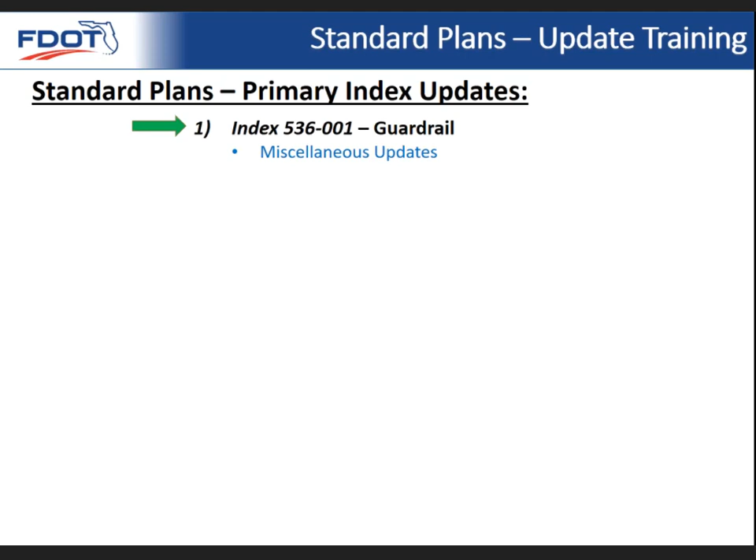Starting off with the guardrail, just some quick miscellaneous updates that might be of interest to the designers. We'll just quickly go through those.

We made some changes for single slope barriers. Basically, the barrier itself, as it connects to guardrail, and the offset blocks have changed. We've got some miscellaneous updates for constructability and clarity.

Today's presentation covers designers' items of interest, and that's true of all the future indexes we're going to talk about. We've made lots of little miscellaneous changes and improvements for the clarity of what contractors are doing in the field, but today we're just going to focus on the things for designers.

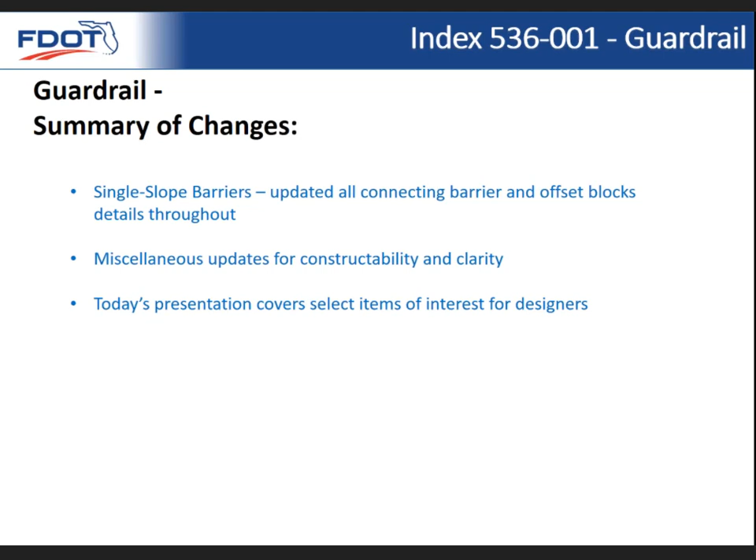For the complete red lines of all changes, if you're interested, you can see the Office of Design Industry Review website at this link.

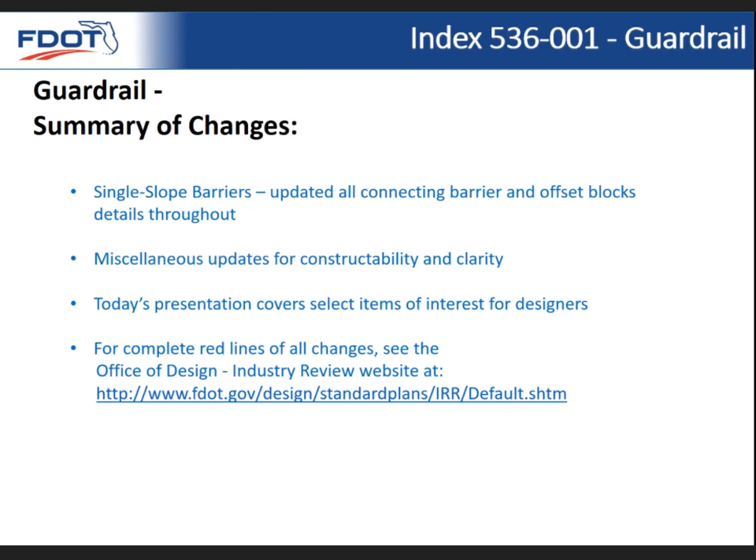Just going through a few things we've changed with the guardrail concerning the designers. We had received some input on this.

In the recently released standard, we went ahead and called out the maximum slope on shoulders for proper guardrail function. We heard some feedback that contractors might only look at the 1 to 10 max and not realize they need to look at the plans. Also, designers might see this and think they only need to meet 1 to 10 max, and don't need to look at the FDM.

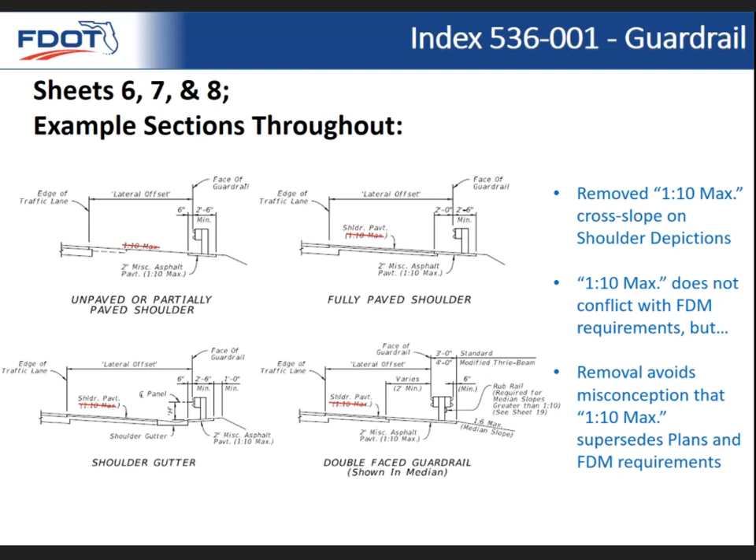While it didn't really cause any conflicts, we wanted users to realize this was not the only criteria, so we removed it as it's called out on the shoulder pavement. We did leave the 1 to 10 max in a few locations, just a generic cross section, and behind the curb, because we still want to drive the point home that 1 to 10 max is the maximum slope for guardrail function. We added a note explaining that the 1 to 10 max is for proper guardrail function only, and if you want to see the project specific cross slope, you need to look at the plans, and the FDM governs the plans.

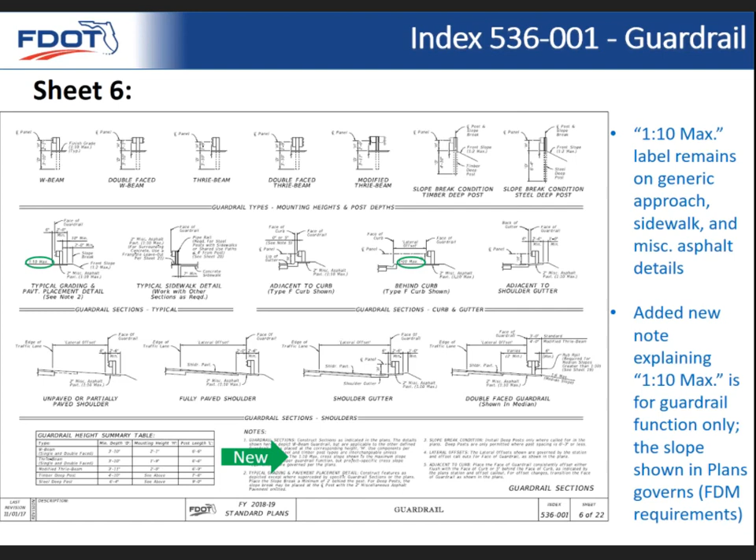Now we're just showing some examples of single slope barrier as it shows up in the guardrail standard. This had been modified in multiple sheets, so we're just going to show you one of them.

Here you can see we now have this new taper down at the very end of the concrete barrier, because the new barrier is 38 inches high, but we still need to end it at 32 inches high to prevent a snagging hazard where errant vehicles could hit the guardrail and slide along. We don't want them to snag on the concrete, so now it's got a little taper down. That shows up in the section views as well.

We also revised some of the offset blocks. We had to finagle these a bit to make it work properly, but we were still able to keep it so contractors only have to make one cut. The offset blocks got a lot thinner because the barrier sections are thicker up high. From the design point of view, we were able to make it so the guardrail width at the connection point doesn't have to change at all—it's the same as it has been in the past, so nothing's changed as far as that's concerned.

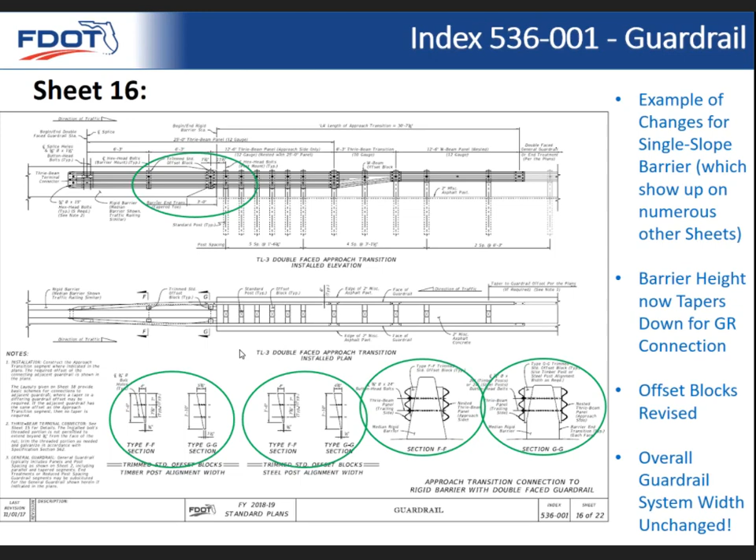And then the last point we're going to mention for guardrail is we've added the ability to terminate the pipe rail on a steel post. In the past, the assumption was that the purpose of the pipe rail is to provide some degree of protection for pedestrians and bicyclists when a sidewalk or shared use path is within 4 feet of the back of a steel post, because there could be sharp edges on the steel flanges. So the idea is that in an urban area, typically you would end with a timber post approach terminal, and then you don't need the steel pipe rail. So you go ahead and terminate on a timber post.

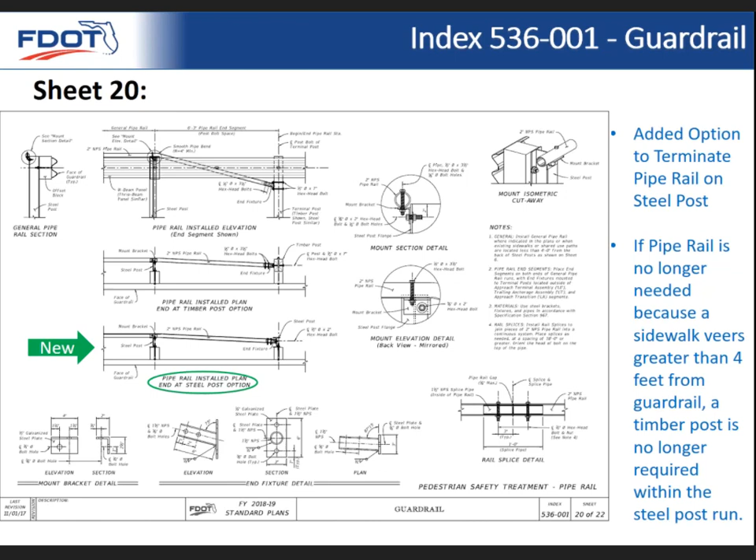Now, it could be a case where simply the sidewalk comes near the guardrail post and then veers away, and then you don't need the pipe rail anymore. So now we've added this new option so you can terminate on a steel post and not have to worry about putting in a timber post among a run of steel posts, because we had gotten some questions from designers on that. So now you have both options. You can end it either way.

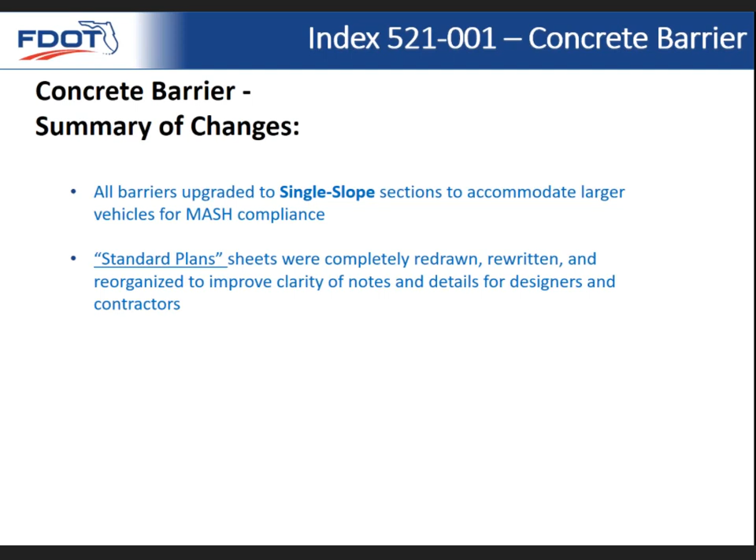We also introduced some new standard plans instructions, or SPIs, just to improve the clarity of the process for designers. It's kind of an educational material, a good starting point if you've never designed concrete barrier. We also have a new length of need design tool to assist designers with learning the AASHTO Roadside Design Guide barrier length process. It's very similar to the one used for guardrail. And we'll take a look at those. Today's presentation just covers the select items of interest for designers.

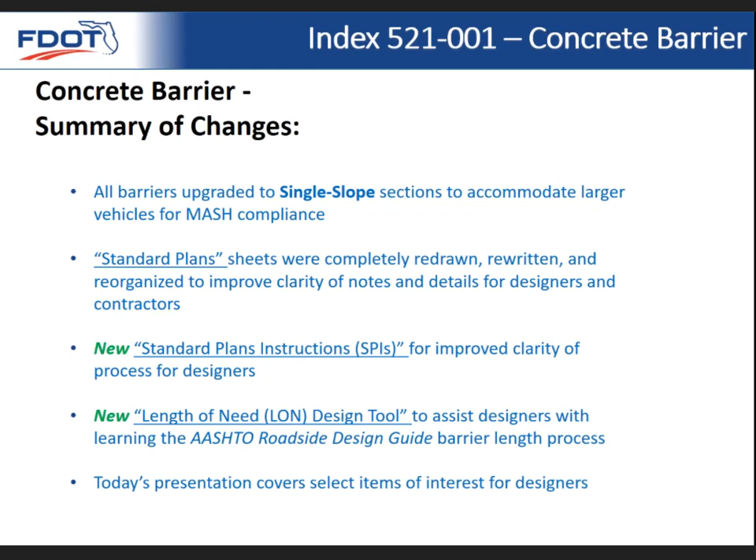So looking at sheet 1 now, we've got a new table of contents over here on the left, so you can more quickly get the information you're looking for. If you notice, we've organized these. We now make it clear there's just 3 distinct barrier types: median barrier, shoulder barrier, and curb and gutter barrier. We'll define those as we move into those sheets as we step through this.

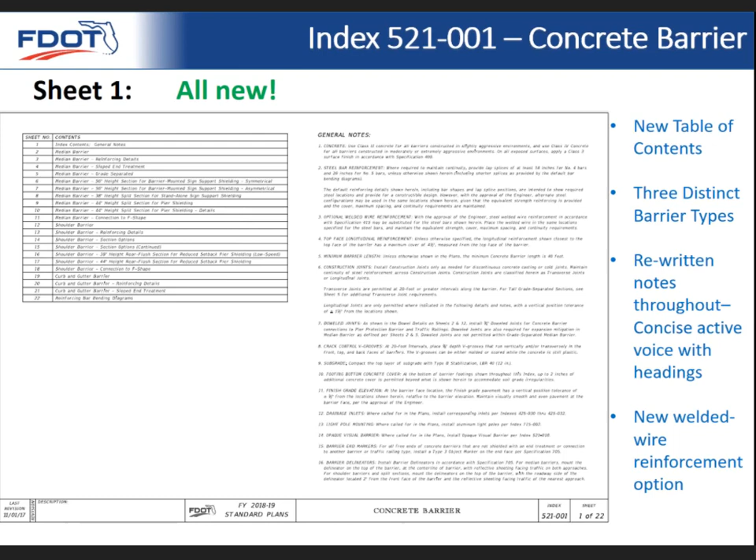We've rewritten the notes throughout with concise active voice with headings. So rather than just a solid sheet of text, when you're trying to find specific information, you can now just look through and look for the note heading that interests you. So we've got a new welded wire reinforcing option for contractors. That's just a note letting the contractor know that they can substitute a welded wire reinforcing for all of the steel rebar mild steel reinforcing that's shown.

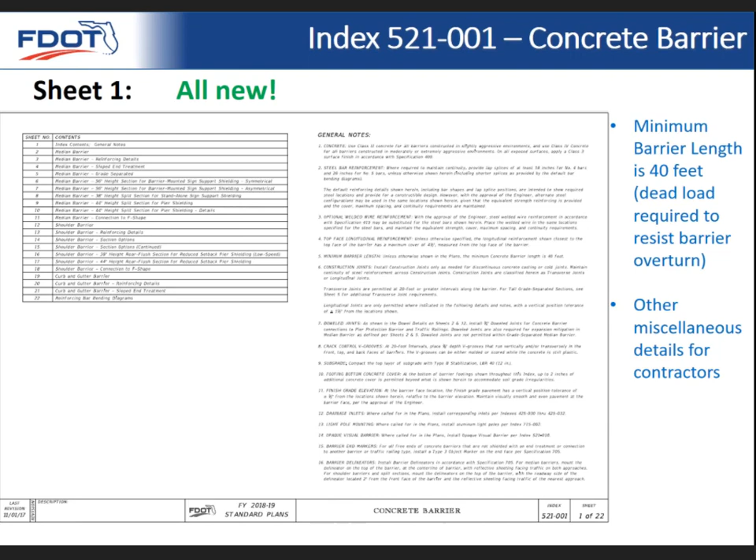And then an item of interest for designers is the minimum barrier length is 40 feet. That's just required for a dead load to resist overturning upon an impact. And then we also have some miscellaneous items for contractors here.

So, moving on to sheet 2 now. This is the first sheet in the median barrier grouping. So the sheets that immediately follow this are all median barriers and variations of median barriers. I like to start off each section with just a simple plan, elevation, and section to show the most basic type of median barrier, just so contractors can get their bearings. And then we show connection to guardrail, connection to traffic railing wherever it's applicable, just as examples for the contractor.

One thing that's new and interesting is that for this particular connection median barrier, you're going to be connecting to double face guardrail, and that requires some length where the guardrail panels are at the same elevation. For that reason, we've come up with a segment that needs to be 16 feet long, where you have symmetrical median barrier in order to accommodate that connection to guardrail. So for the last 16 feet, you have to use your basic type of median barrier, which is 38-inch height, shown here.

And then after that, you can transition into the sign support type of barrier or grade separated barrier, or basically all the options we're going to show you on the upcoming sheets.

Speaking of the options on the upcoming sheets, we now have 4 pay items for median barrier. The first is just 38-inch height symmetrical, which is shown here. That's the basic one. The next type is short grade separated, which is on upcoming slides. Then the tall grade separated, which gets even more complex, adding the footing to it. And the last one is just variable section for sign and pier shielding.

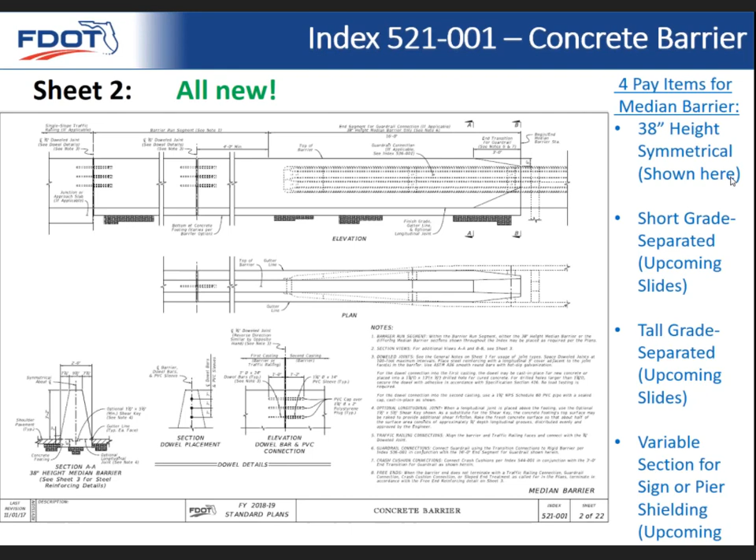On the next sheet, we're showing new reinforcing we've added to the median barrier. Essentially, this provides some nice continuity for impact of larger vehicles for MASH. It provides support. This is the minimum possible reinforcing needed in order to slip form properly, and it prevents the concrete from slumping. These are taller, narrower barriers, and so now we have reinforcing in these as well.

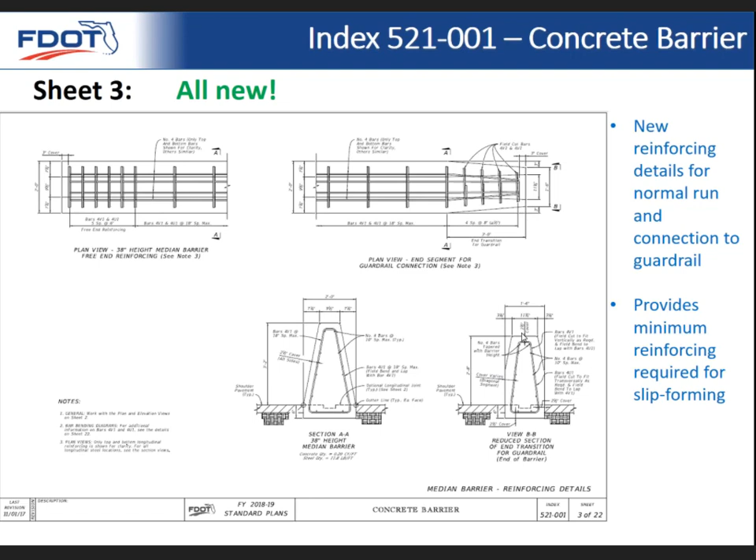We also show the details on this sheet for narrowing down the section for connection to guardrail. You can see we have our 3-inch cutback to avoid wheel snagging. And then the height also reduces to get down to guardrail height so that vehicles won't get snagged over the top.

Looking at sheet 4, this is for our sloped end treatment. This is basically used in the medians for median barrier on the trailing ends and then outside the clear zone. Anytime you have approaching traffic that's within the clear zone, you're going to want to shield the blunt end with either a guardrail approach terminal or a crash cushion. But this is just for the trailing end and outside the clear zone.

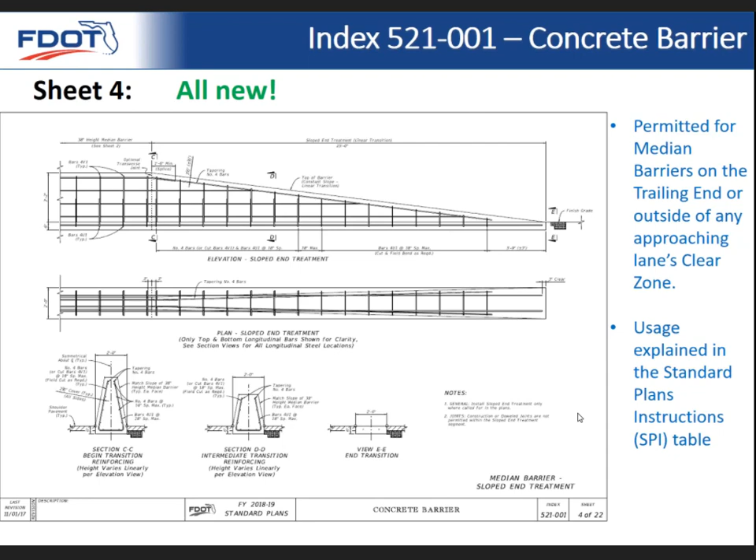And so the usage is explained clearly in the new SPI. We have a nice table to explain end treatments for approach and trailing ends of all of our barrier types. But this is what that's used for.

Now, from a design standpoint, our grade separated barriers are very similar to the previous standards. That's a note I want to make too—when I say all new, I mean it's completely redrawn, and all the notes are rewritten for clarity. Obviously we moved to the single slope barrier, but most of the concepts are carried forward from the previous standards. That's why I'm not going into detail on every concept.

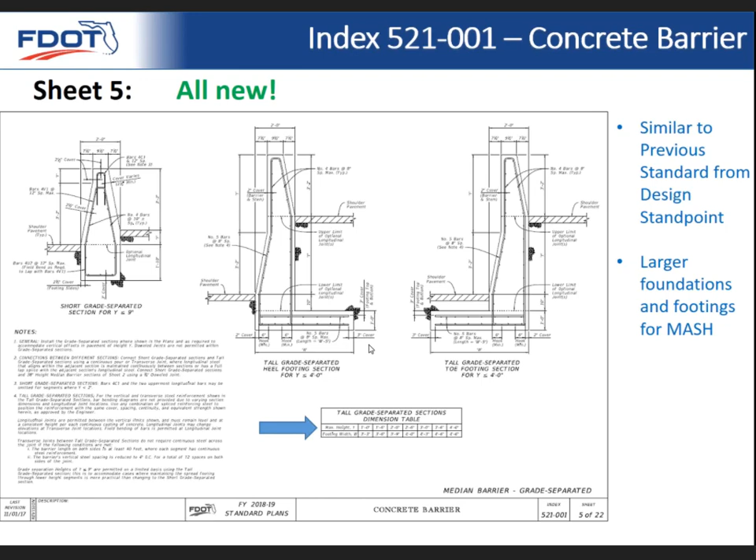So it is similar to the previous standard in terms of how it works with grade separation. There are minor changes in the heights that apply. It's also important to note we have a little bit larger spread footings for MASH, which are seen in this table. So if you're used to the footings being a certain width, just know that they've gotten a little larger, and you can account for that when planning which footing you want to choose and where your utilities happen to be.

Moving into sheet 6, which is for supporting signs, this is the option with the minimum width barrier section. We also have an upcoming option that can accommodate a larger width if you have more lateral clearance.

We've clarified where the project-specific reinforcing goes, as needed, to support the overhead sign support and then connect that continuously to the foundation. This is all a project-specific design that'll typically need to be made by a structural engineer and placed in the plans. The notes here make it a lot more clear what needs to occur in terms of what needs to go into the plans regarding project-specific reinforcing.

The one other thing I wanted to mention is that the pedestal width and then the overall length of transitioning to this width is governed, obviously, by the project-specific width of the sign support.

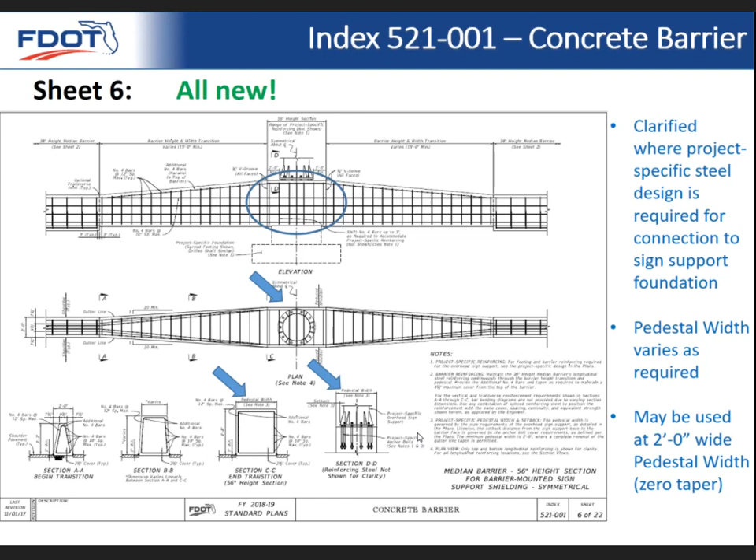The minimum the pedestal can be is 2 feet wide, which corresponds to the width of the barrier. If the pedestal width is 2 feet wide, there's no taper, which is permitted in the note. This becomes the linear section, identical in design to what we covered on a whole sheet in the previous standard, just with the pedestal width only 2 feet wide to match the barrier, and no taper. There was no reason for a whole new index sheet to explain that, so we placed it in the note instead.

This is basically the same thing, just asymmetrical, so now you've got a shoulder reduction on one side.

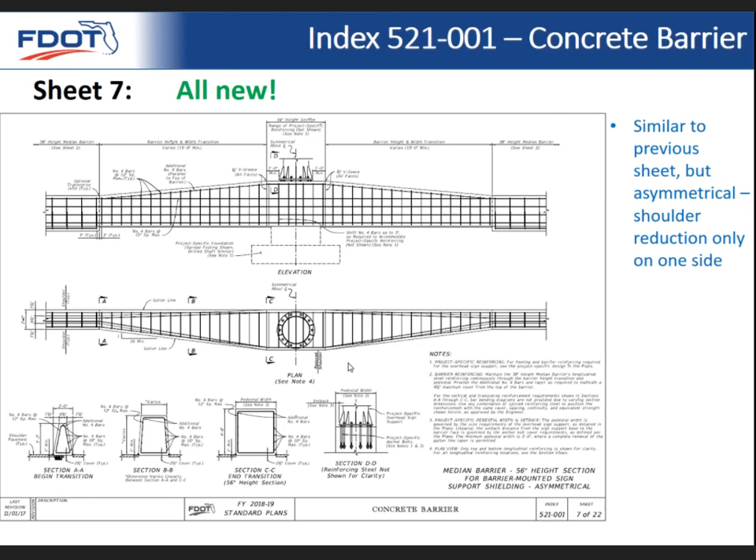The previous sheet I showed you was for the least amount of lateral space, the least amount of width. If you happen to have some lateral space available on your project, some designers may prefer this option, where you have an overhead sign support that you're shielding, but it's independent of the barrier—you don't put reinforcing through the barrier, it just goes around it. This index sheet can also apply if you have an existing sign support and just need barriers to go around it.

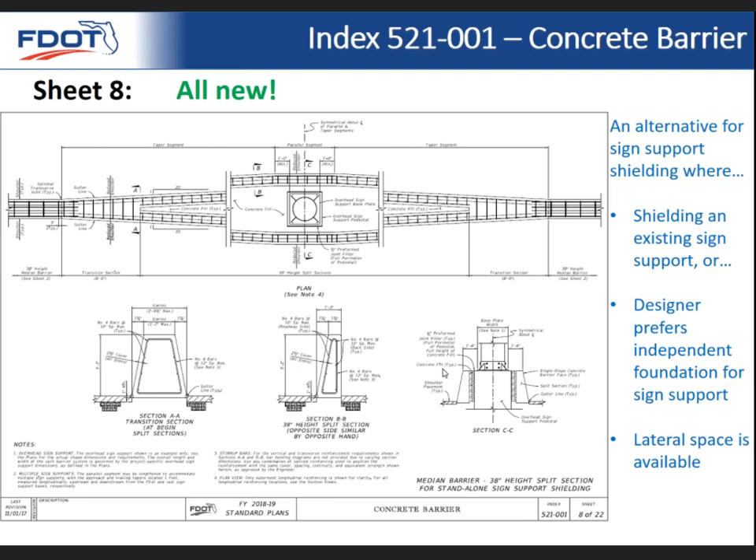Now we're getting into shielding of the pier. I want to point out that this, as opposed to the pier protection barrier which is the next index we'll talk about, is only shielding the pier for the crashworthiness benefit of the vehicle—so we're talking about vehicle safety. The assumption is that the pier is designed to withstand the impact of larger trucks. If that's the case, you're not really trying to protect the pier itself, and you can go ahead and use this index sheet.

When the pier is not designed to withstand impacts, you want to use the pier protection barrier, which I'll show you in the next index, 521002. I just wanted to throw this concept out there—people may want to give it more thought, especially when designing a new project. We have guidance on this in the standard plans instructions, and the FDOT design manual explains the process further for deciding whether or not you need pier protection barrier.

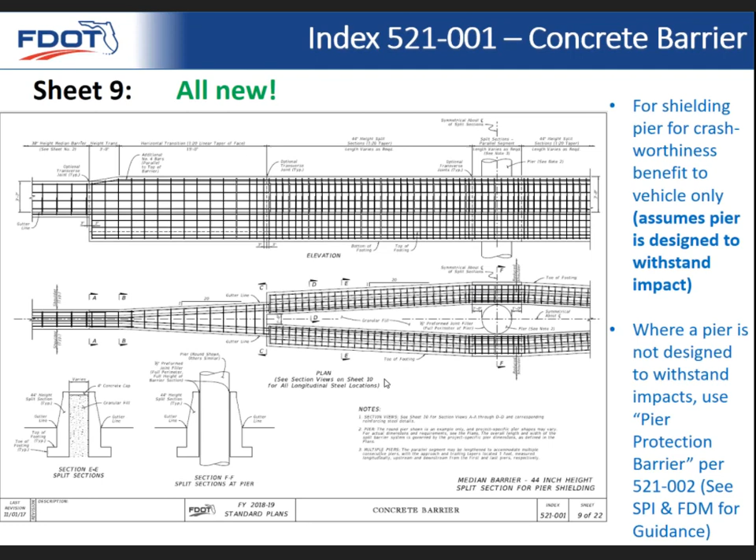On the next sheet, we have some cross sections showing the geometry you'll need to fit in your plans that go along with the previous sheet. We have all the cross sections cut, and they show up here.

Now this is something that's truly all new, because we're transitioning between the existing old F shape and the new single slope barrier, or transitioning to a single slope traffic railing. This handles any combination of going back and forth between single slope and F shape, and we generically call it the F shape section on the right for that reason.

For example, you can have an existing older bridge with an F-shaped railing. For whatever reason, you're putting in a new roadway project and want to use the shiny new single slope. On the left you're using option A, the 38-inch high median barrier. You go along with a continuous concrete section, then a 10-foot transition segment that goes to the F shape, and then you dial into the existing traffic railing.

Also, you might have miles and miles of F-shaped barrier out in the field, but you want to install a bridge, and since design life on a bridge is pretty long, you want the nice new single slope there. In that case, you use option B on the left side for the traffic railing on the bridge, with the existing roadside barrier on the right. You have your 10-foot transition, and before connecting to the new bridge, there needs to be a minimum of 2.5 feet.

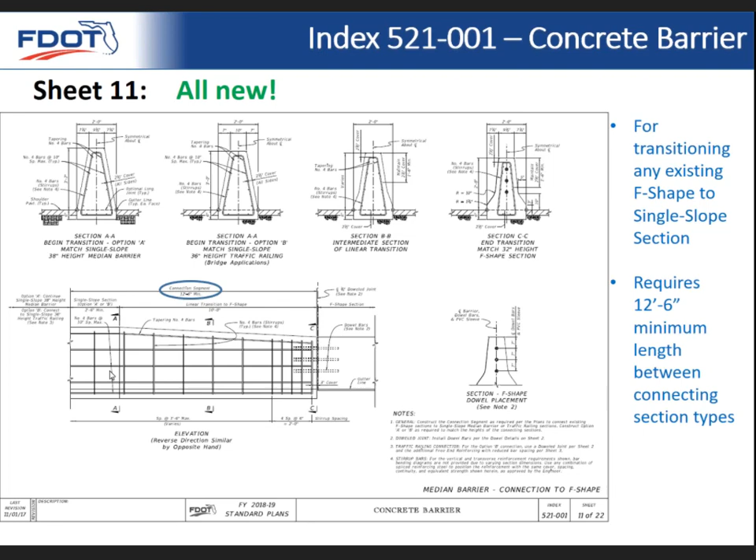Moving on to sheet 12, we're now kicking off the shoulder barrier grouping of the index sheets. Again, we start each grouping with the basic elevation plan and section view so contractors get their bearings, then how to connect to guardrail.

In this case it's more simple, just a single face shoulder barrier, and how to connect to traffic railings and the like. Shoulder barrier is typically used on outside shoulders, basically where median barrier and curb and gutter barrier is not used. Generally, if you had lateral clearance available for deflection of guardrail, that might be your first option. But if you were shielding things on the roadside very close to the barrier and needed something rigid, you could elect to use the shoulder barrier.

Now this gives you a preview of the upcoming sheets. You have 3 pay items for shoulder barrier, pretty similar to the past. We have the 38-inch and 44-inch height. The BOE explains pretty clearly that those are the same thing, and that's just the basic shoulder barrier as shown in this section.

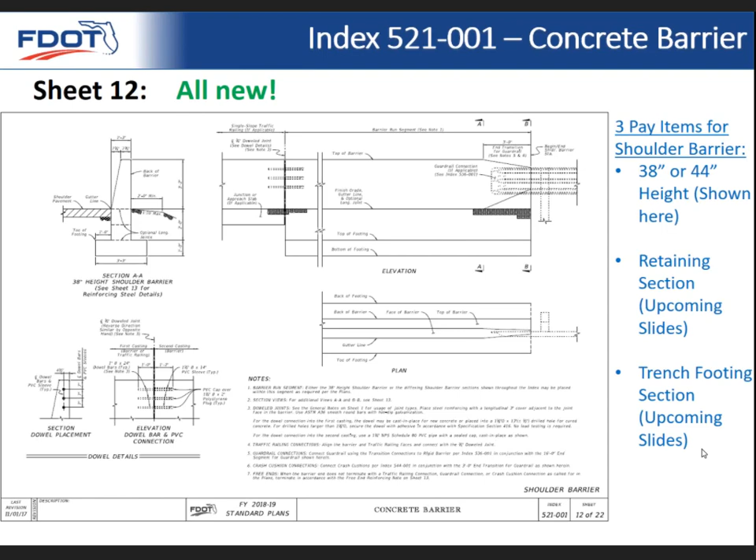We allow it to move up and down to reduce the ZOI requirement without changing pay items, which is why there's 2 heights permitted. We have a retaining section we'll see on upcoming slides, and a trench footing section on upcoming slides. Let's go ahead and move into those.

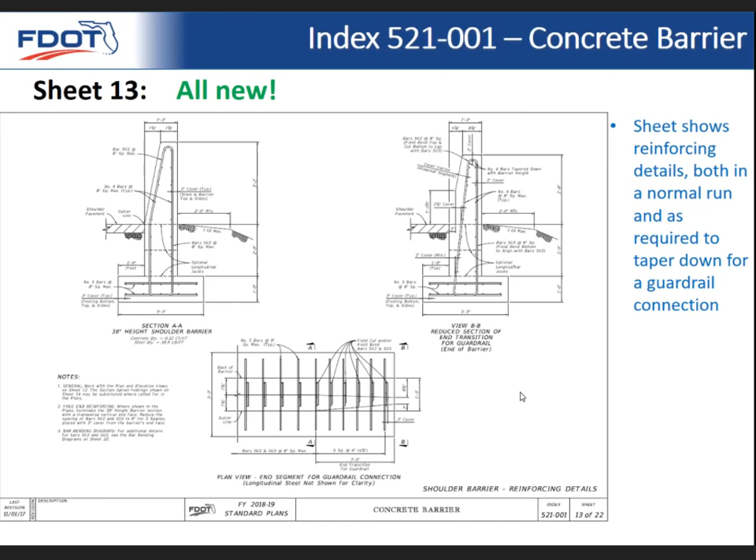Quickly before that, we'll show you some reinforcing details. Again, we have the reinforcing showing the transition for guardrail where the section actually narrows. It also gets shorter to prevent snagging. In the previous standard, I don't think we really had the details to show the connection for guardrail in this case, so now we've provided those. And here are those alternative sections.

You can select these as a designer as required. For the retaining section, one thing to note is that the heel has been extended by a foot to help support this soil - that's new in the new standard, so take note of that. And now we have a new trench footing option, which could be more convenient for contractors. It's a little more simple than the spread footing design.

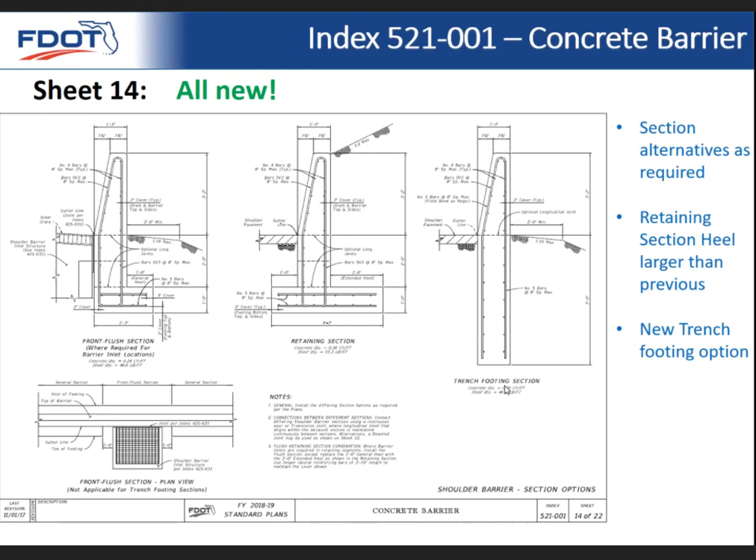If you don't have any issues with depth of utilities or anything like that, you can consider adding that in. And then a couple more sections accommodate basically reducing the setback requirement or zone of intrusion. We're talking about shielding piers, and those work on the next sheet.

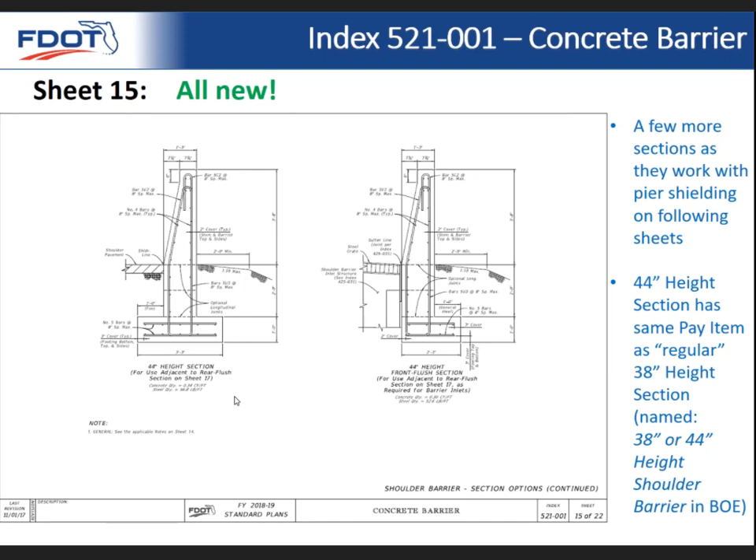Again, as I mentioned before, this 44-inch height section, by just raising it up a little bit, can still use the same pay item as the so-called standard 38-inch height. That's clearly explained in the BOE.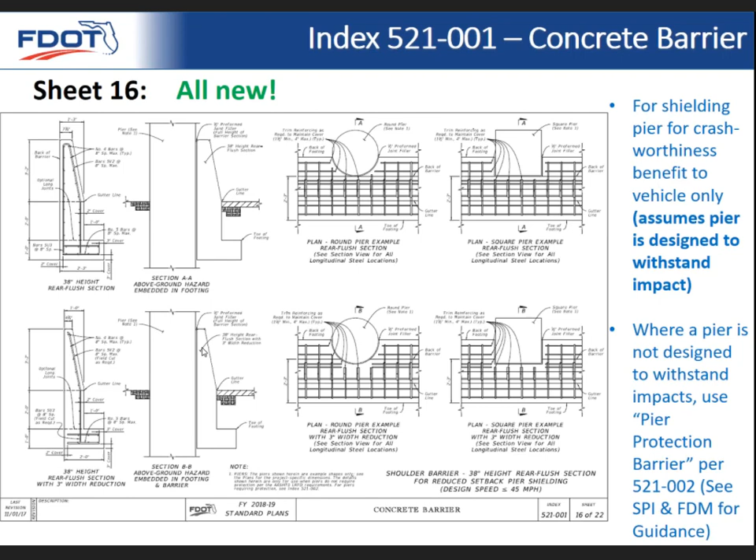Okay, so again, I'm going to go quickly through a little spiel about pier protection. This is only really for the benefit of the vehicles. We're assuming that pier is designed to withstand impacts per the SPI, FDM, and eventually LRFD requirement - that's all explained clearly in these documents. So the limitation here is it's assuming the pier is designed to withstand the impact itself, and we're just providing shielding for the benefit of the vehicle.

This particular sheet is designed for low speed, as opposed to the next sheet, so it's less than or equal to 45 miles per hour. What happens is the setback requirement for zone of intrusion, if a vehicle were to hit this, basically drops to 0 when the design speed's low. So the height of the barrier is not a concern in terms of zone of intrusion. We went ahead and had an option where we keep the barrier height at the standard 38 inches - from a construction standpoint, it's simpler and less expensive, so it's more efficient to have this option.

We also have two options. The first thing you would go for is to keep the full section width when shielding this pier, just for ease of constructability for contractors. If you absolutely had to, because you're very pressed on space, you can go with the section that has a 3-inch reduction, where the barrier essentially wraps around the pier.

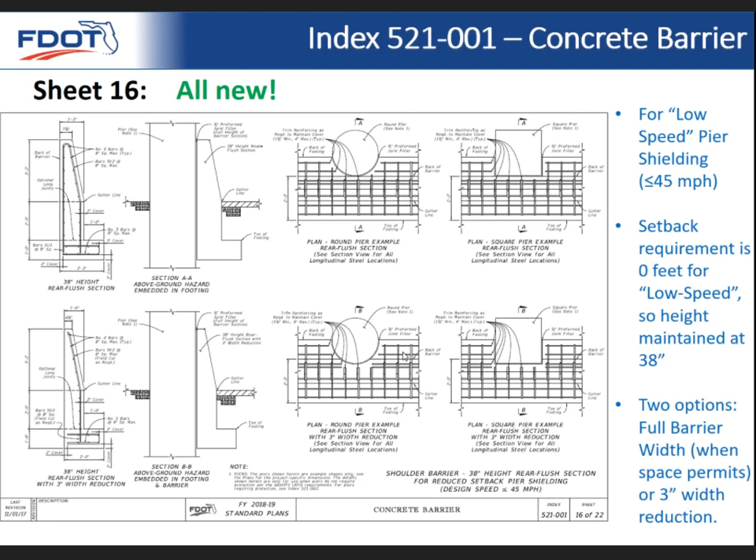On the following sheet, it's the same basic concept, except this one is used for all design speeds. Because of that, in order to reduce the setback requirement, we've raised up the barrier, basically to reduce that setback requirement of the FDM and reduce the zone of intrusion. So for all design speeds, you've got to raise the barrier up a little bit higher.

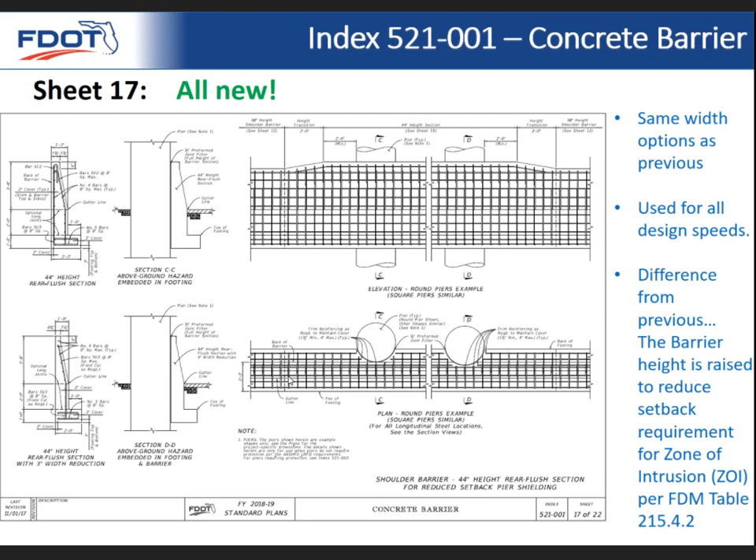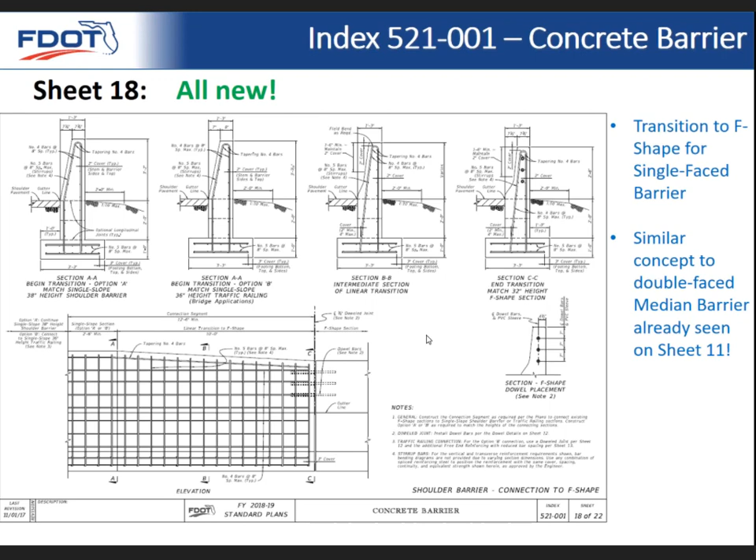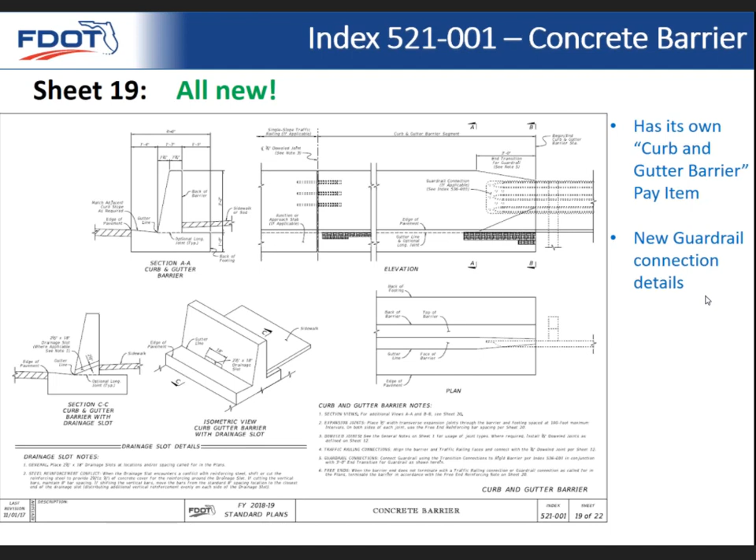It has its own curb and gutter pay item, and then new guardrail connection details. One point to emphasize moving forward is that the guardrail approach terminal is basically now becoming our primary first choice option for protecting the blunt end of this barrier in an urban area, so you're going to want to try to use an approach terminal.

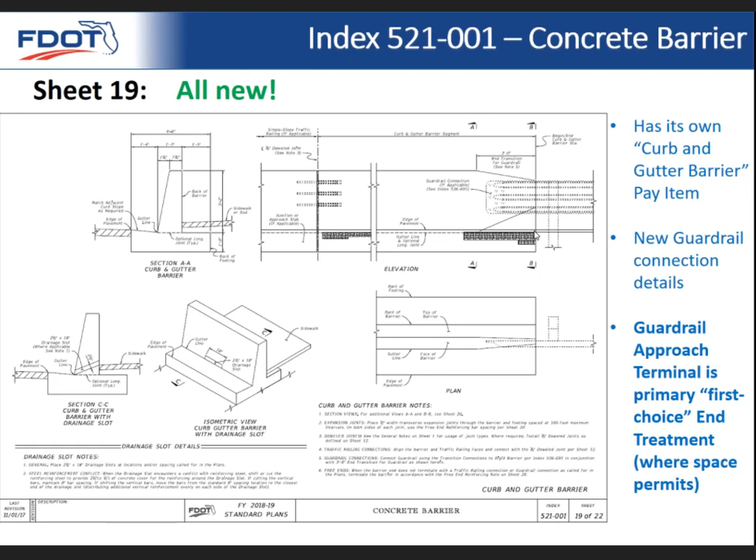That's opposed to the previous standard, where the only option we had was a sloped end treatment. Really, we only want to use that where we have no better options, and that becomes like the last resort. We have some restrictions on that, which I'll show you in upcoming slides.

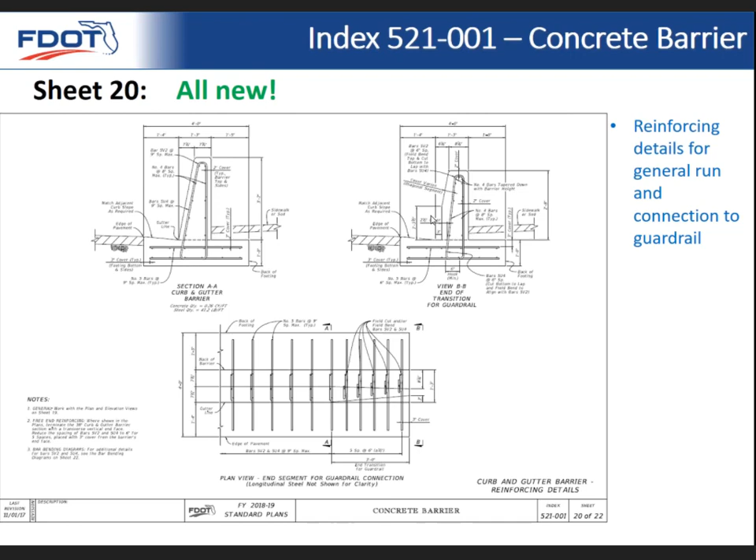The reinforcing details for the general run of a barrier are shown here, and then also the reduction in section width as it connects to guardrail. So we have that all handled.

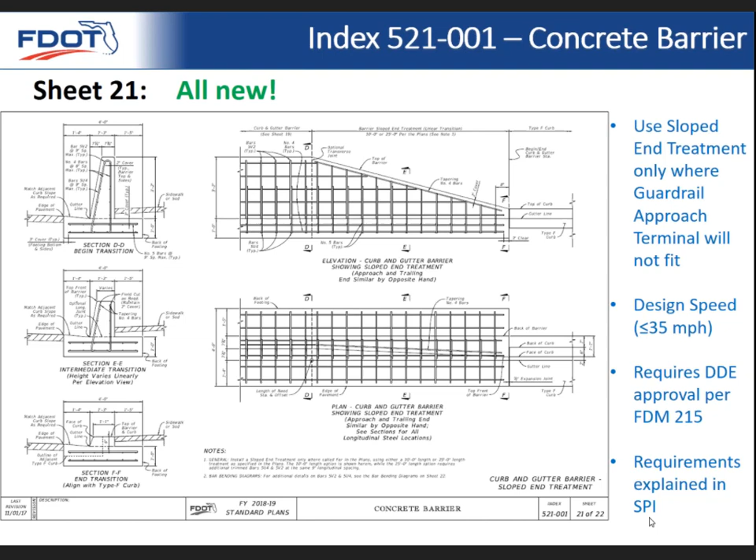So the requirements are explained in the standard plans instructions. We've got some reinforcing details for contractors, and then that wraps up looking at the index sheets themselves.

Now, one thing I wanted to show you really quickly is the new standard plans instructions. I consider this kind of an educational document—if you're a new designer, this is the first place you would look to understand how things work. So let's go ahead and open this and see if it opens. This would hopefully be written more clearly than I can explain in this brief introduction, but I just wanted to give you the overview so you have a feel for it, so the next time you open it up, you'll already have your bearings.

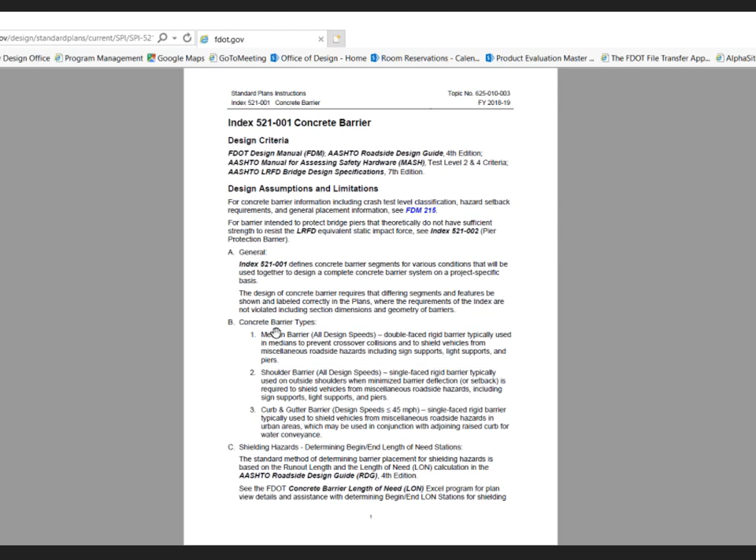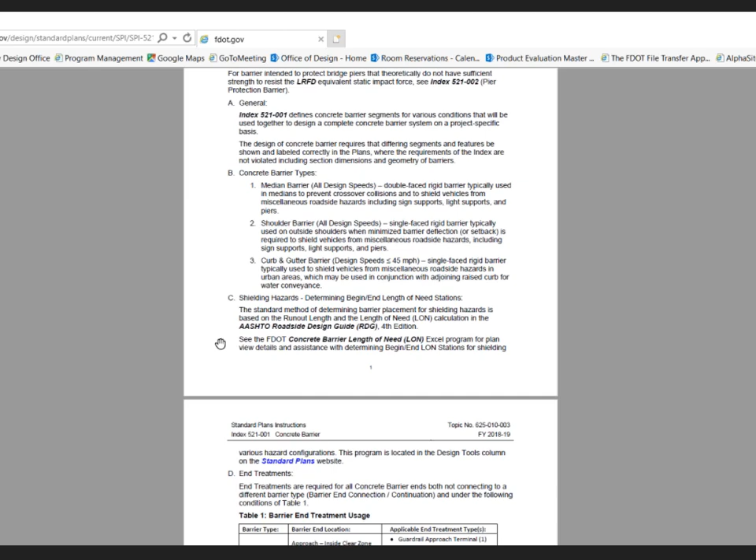We give a brief explanation on the concrete barrier types—median, shoulder, curb and gutter—the design speeds that apply, and what they're typically used for. We then go into shielding hazards and what our basic method is for determining the length of need. That will refer you to the FDOT design tool, which I'll show you next. We've got the different end treatments, explaining approach and trailing ends, and what you would do for all the barrier types.

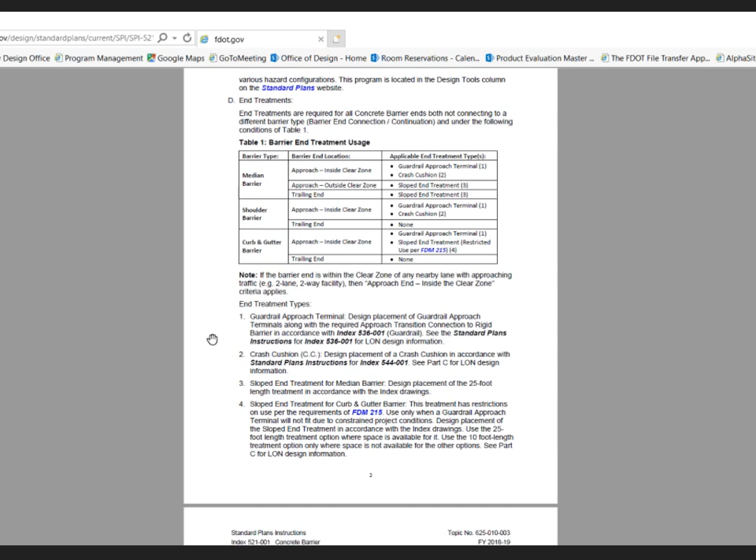And then how to connect to different types of barriers, and then just general plan content requirements. So I just wanted to give you a brief overview of what's in there because that's all new.

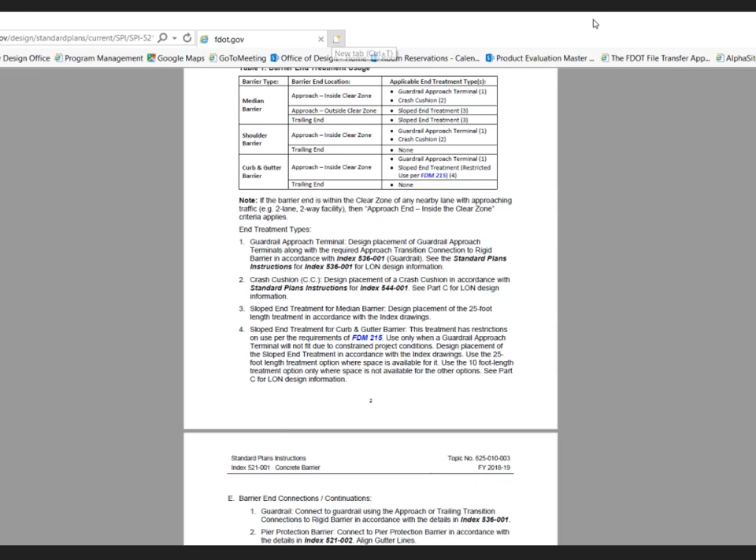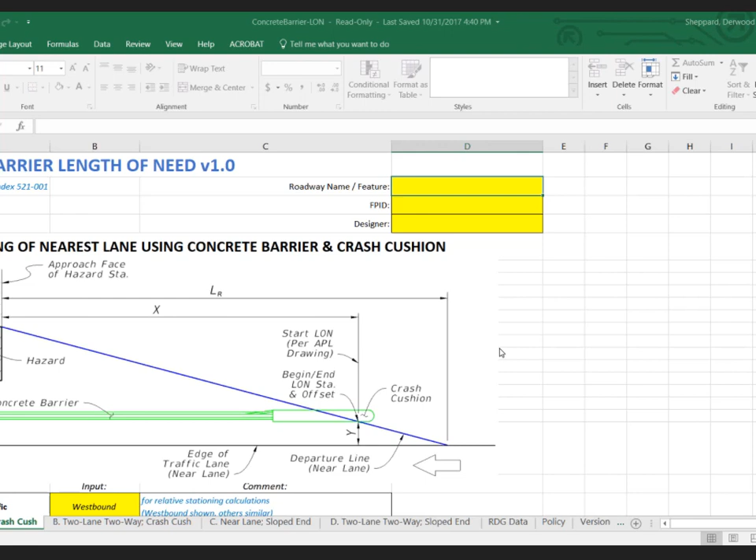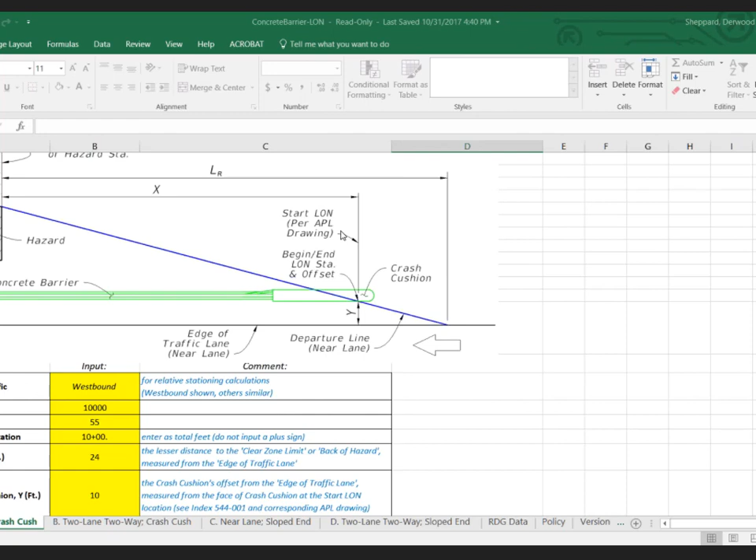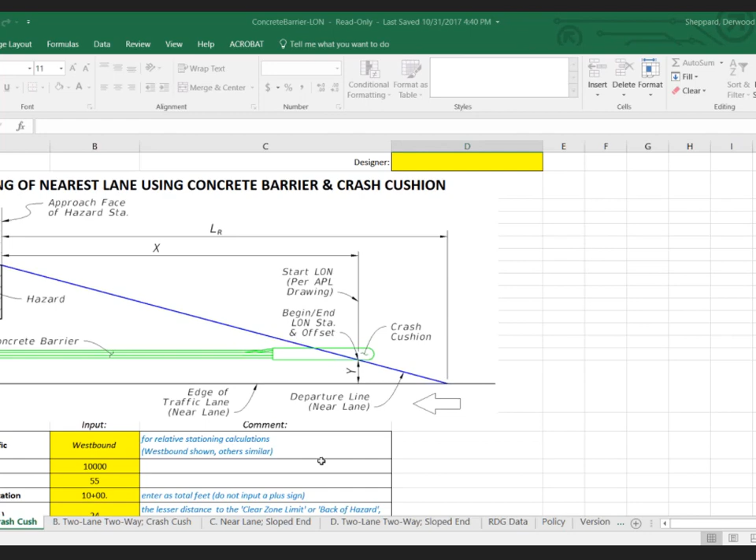So, vehicle down here going from right to left, you're shielding this hazard. It explains how to place the barrier and how long it's needed. The design input should be defined pretty clearly, and mostly this can be seen as a learning tool to understand the AASHTO roadside design guide, because that's the basic process we're using. We then consider two-lane, two-way. If you're in the clear zone from this lane of traffic on the left, going from left to right, you go ahead and design for the opposite side. So I just wanted to show you that real fast.

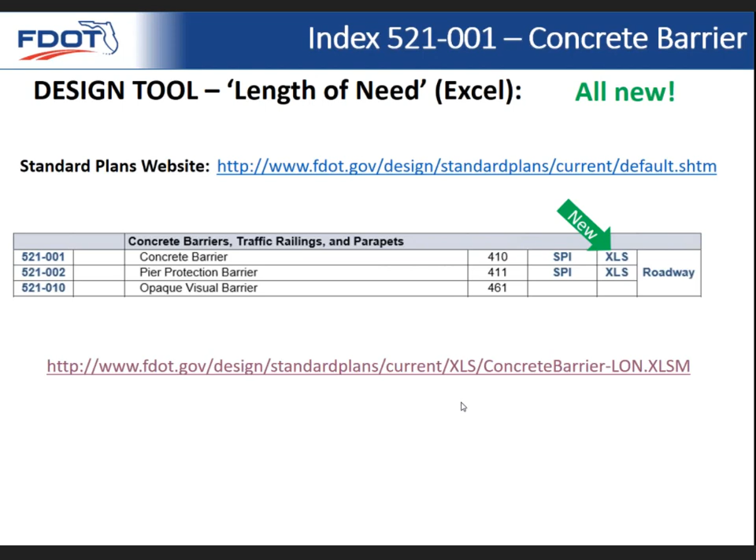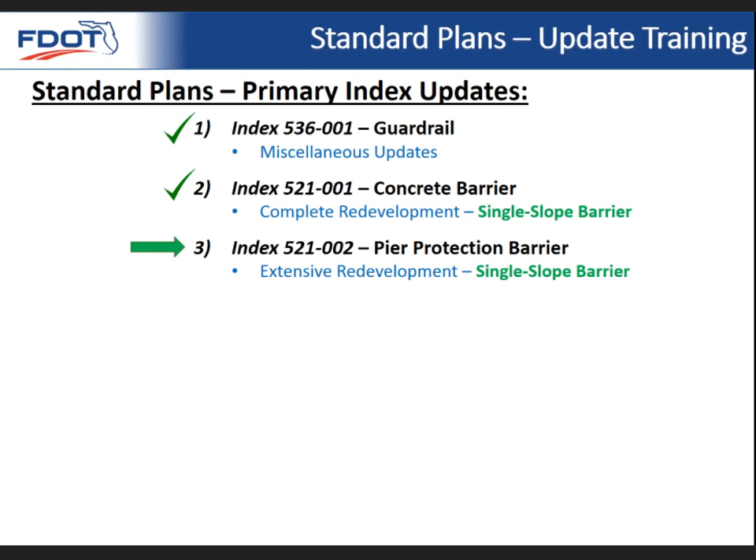Okay, now we're moving into pier protection barrier. This is significantly shorter than the concrete barrier, so we should get through it a little more quickly. I call this an extensive redevelopment because we did redraw and rewrite all the notes, but some things like the crash wall and the footings were in pretty good shape in the previous standard, so we were able to just copy them forward almost identically.

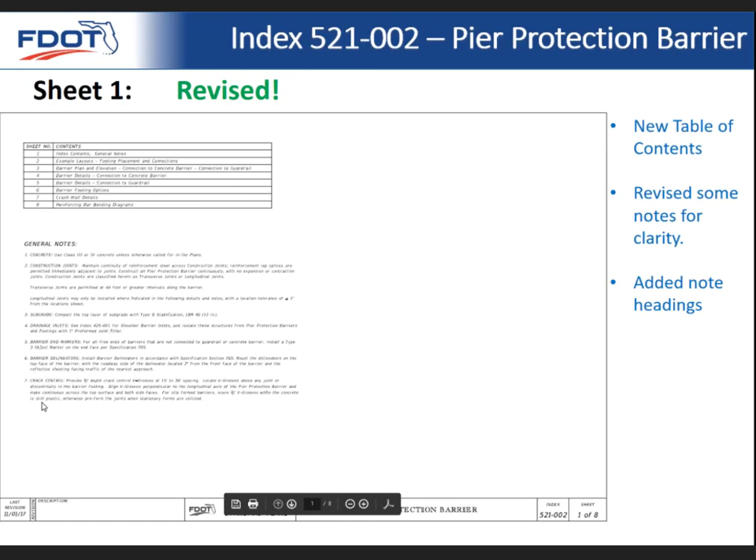So here we've revised sheet 1 for the general notes. We got a new table of contents so you can quickly find what you're looking for. We revised some notes for clarity, added note headings so you can quickly find your information. And the example layouts are helpful for designers and contractors alike, to understand what to do in various situations when placing this type of barrier in the footings around the piers you're trying to protect.

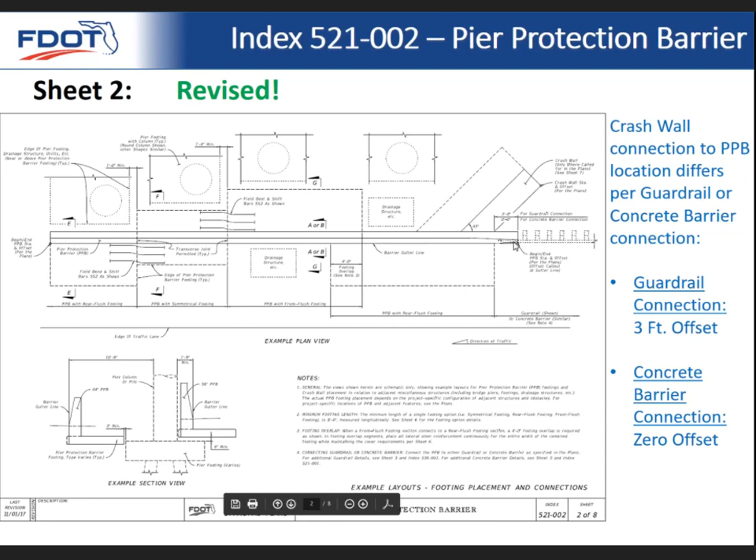We also now show in this example the optional crash wall, and then a connection to guardrail or concrete barrier connection. One interesting thing I want to point out is that if you're connecting to concrete barrier — here we're showing guardrail, but you can also connect to concrete barrier for the previous, smaller standard than pier protection barrier — then the crash wall would start at the end of the pier protection barrier, at 0 offset. If you're connecting to guardrail, you need to set that crash wall 3 feet back, as shown, for the through bolts to work properly. So you need to provide space for that — that's a difference in geometry you need to be aware of.

We've got a new plan and elevation sheet showing all the different combinations of height and what you're connecting to. Essentially, you need a 56-inch height barrier if the pier you're shielding is within 10 feet of the back of the barrier. You need a 44-inch height barrier, a little bit shorter, if your pier is more than 10 feet behind the barrier. That's an LRFD standard, and the guidance is provided in the SPI so you would know that. Down here, we show the difference in connecting to concrete versus guardrail — you can see the 3-foot setback for the crash wall.

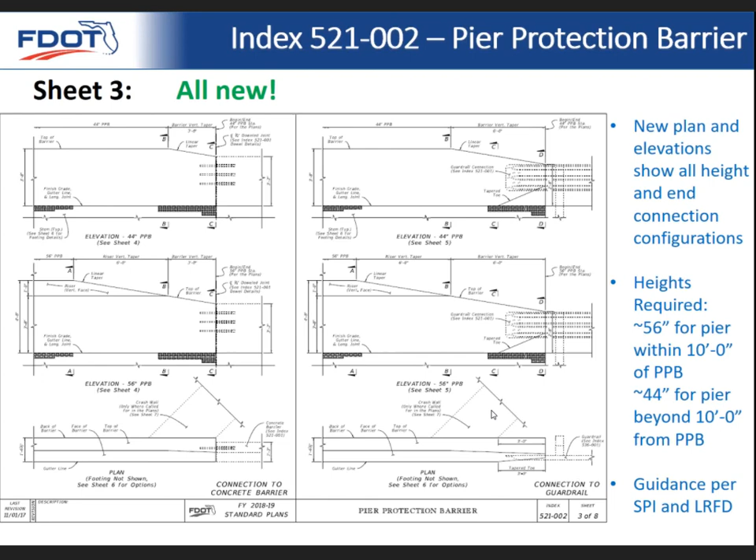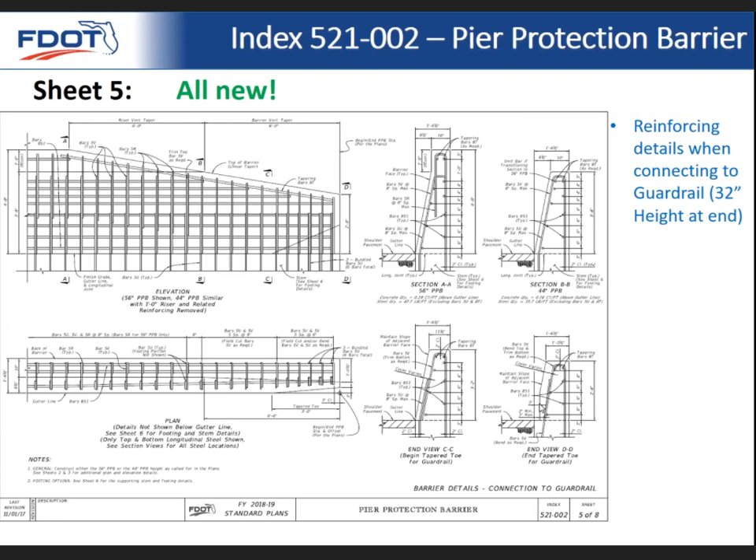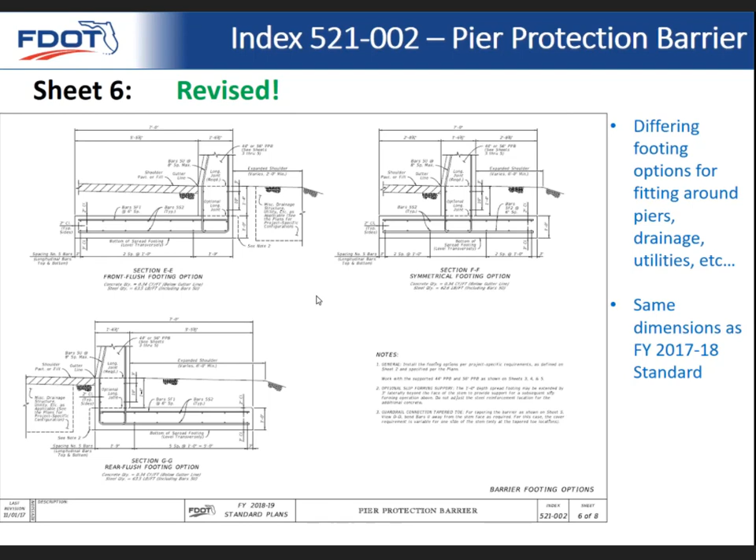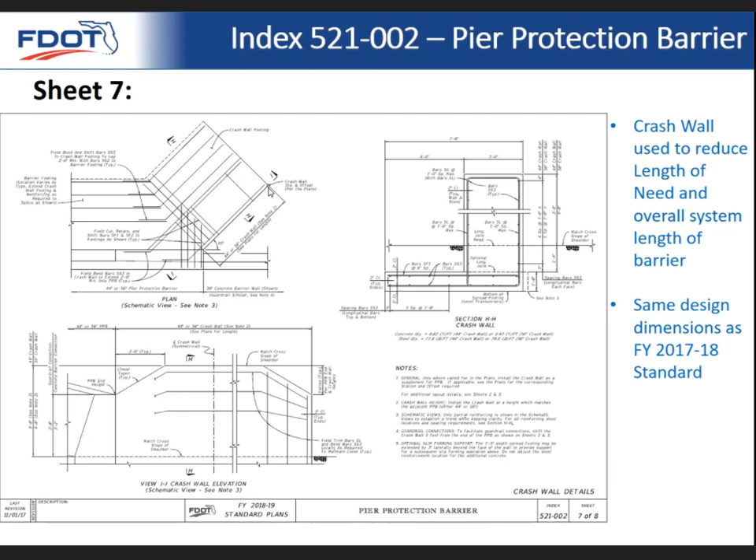And then finally, the crash wall. This again has the same basic geometry as the previous standard. One thing I'll point out is we added a little point here, station and offset for the crash wall. If the roadway designer puts that in their plan, that point then defines all the rest of the geometry per the standard. So that point's important — it would also be the length of need point as well, in terms of the station.

And we've got some reinforcing details for contractors, and that wraps up the index sheet portion. So again, we've heavily revised what used to be the instruction for design standard, now called the standard plans instructions. We gave it the organizational structure of the guardrail and concrete barrier sections just to make it easy to find your way around and find the information you're looking for.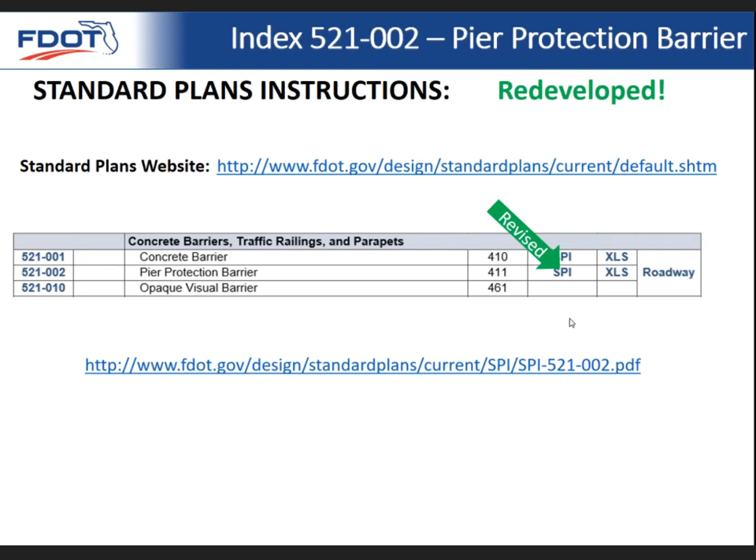Anyway, I won't open that right now in the interest of time. But again, we look at the SPIs as educational material. It should be explained pretty clearly to help you learn about the design of pier protection barrier.

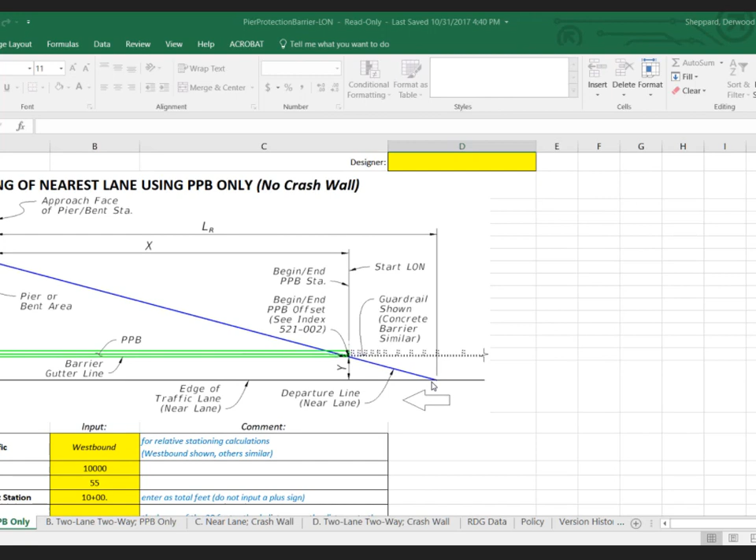And then one thing I will open, this is all new, is the length of need design tool for designing pier protection barrier. So I'm going to show you a couple plan layouts of what you'd be designing. This would be for the simple pier protection barrier, and you can see where your length of need point is to shield a pier for vehicles moving left to right.

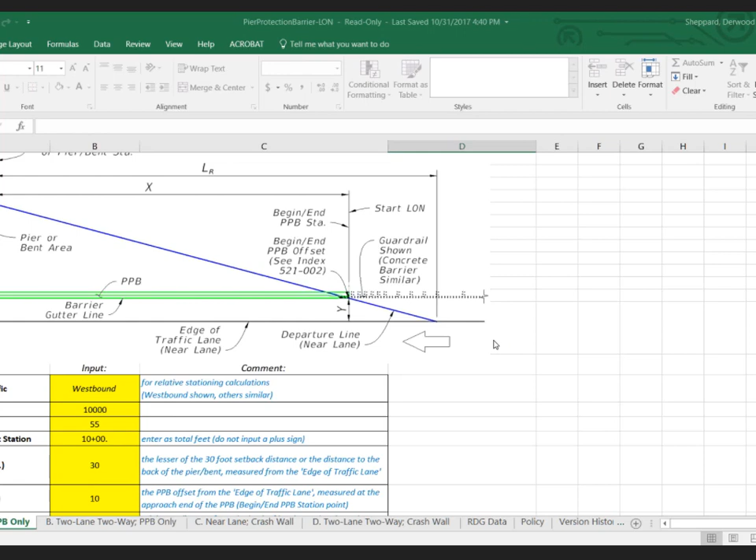We then have the opposite direction for 2-lane, 2-way. If this pier happens to be within 30 feet, then you need to design for the opposite direction.

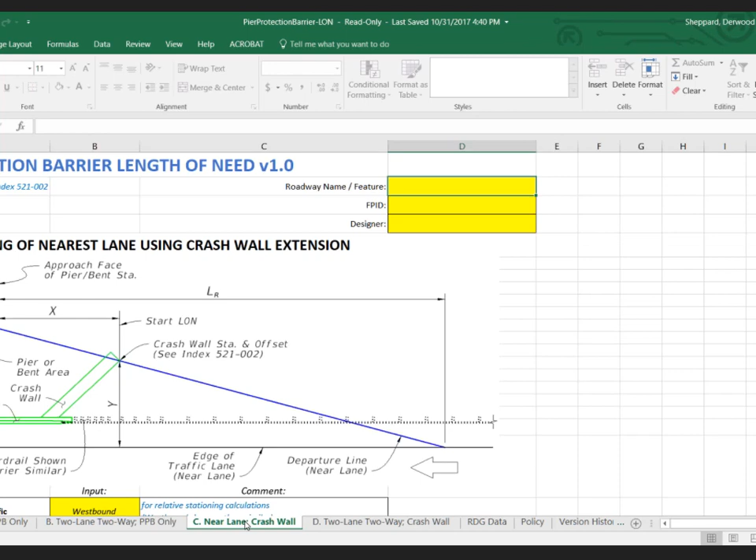And then I wanted to show you the crash wall. The purpose of the crash wall is to reduce the overall length of the system. It reduces considerably, as you can see, from this length to this length, because you're gaining a lot of lateral offset, which reduces your length of need.

The one other thing I want to mention is that if you're using a crash wall, the assumption is you're going to be placing guardrail in front of it, and you'd typically have a connection to guardrail. So for the benefit of general vehicles, you need to shield that crash wall. The guardrail would need to extend at least to this point. That's another thing I want to point out: the crash wall is considered a hazard to vehicles, though it protects the pier itself.

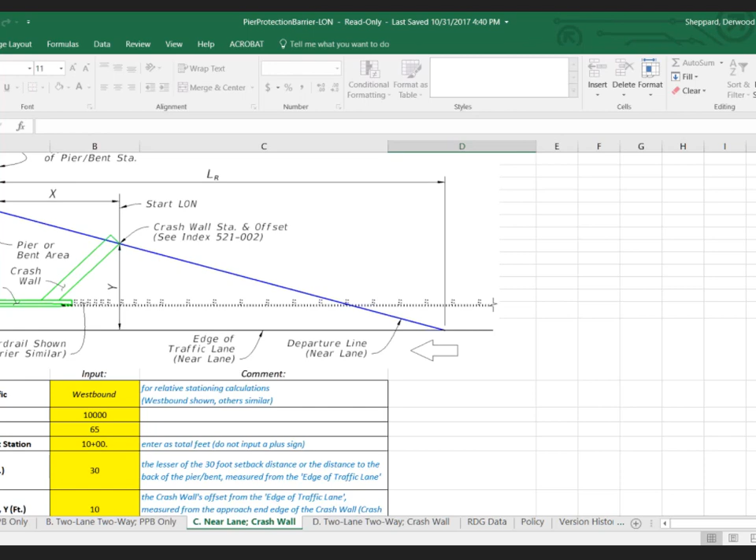Okay, so moving on to our inlet types as they work with barriers. These should all go much quicker, they're just 1 or 2 sheets per index.

Speaking with Carl Spirio, the state drainage engineer, we recognized that the benefit from that wasn't quite worth the time it took to construct these things. We found that in a lot of cases, contractors were just chiseling out a throat indentation, and it wasn't really performing as we had intended. We noticed in a lot of cases it was collecting debris and trash and things. So for the sake of simplicity, we just went ahead and removed those throats.

And what that did was reduce the quantity of combinations of types of inlets from 5 to 2, because it used to be you had either one side of the wall or both sides of the wall, and with all the combinations of throats, there were 5 types. Now there's only 2: Type 1 is inlet on one side of the barrier, Type 2 is inlet on both sides of the barrier. So that's gotten a lot more simple.

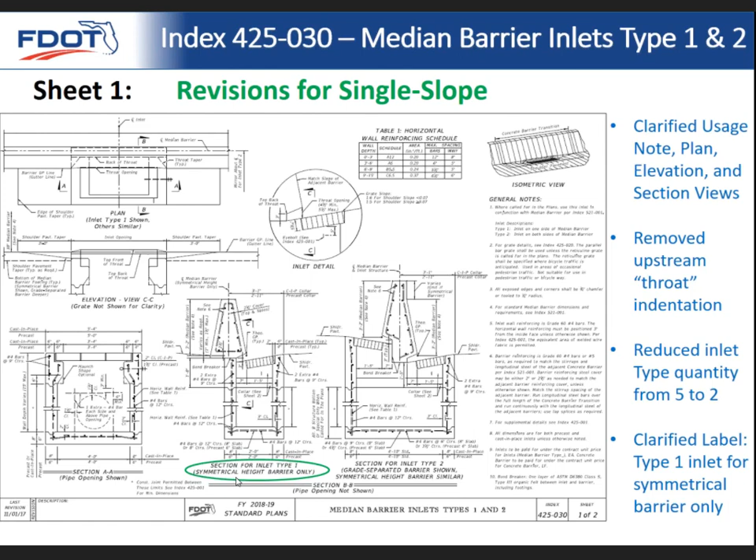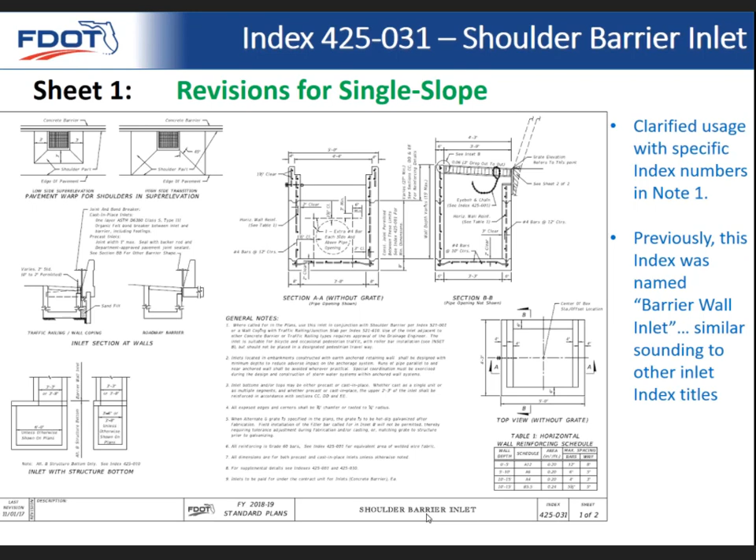Moving on to shoulder barrier inlet. This one's pretty quick. We switched things to single slope and clarified the usage. The major change is just the name of this index sheet. It used to be called barrier wall inlet, very similar to the other 3 types of inlets that work with barriers, so the usage wasn't clearly distinguished. Now we've made an effort to do that. In index 521001, there's the median barrier, shoulder barrier, and curb and gutter barrier, and this one works with the shoulder barrier. We wanted to make that clear and call out exactly what index it works with. That's basically the only change there.

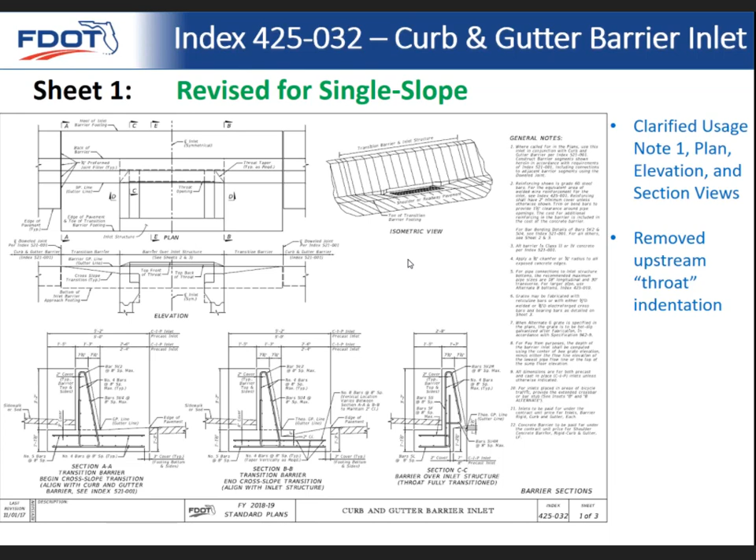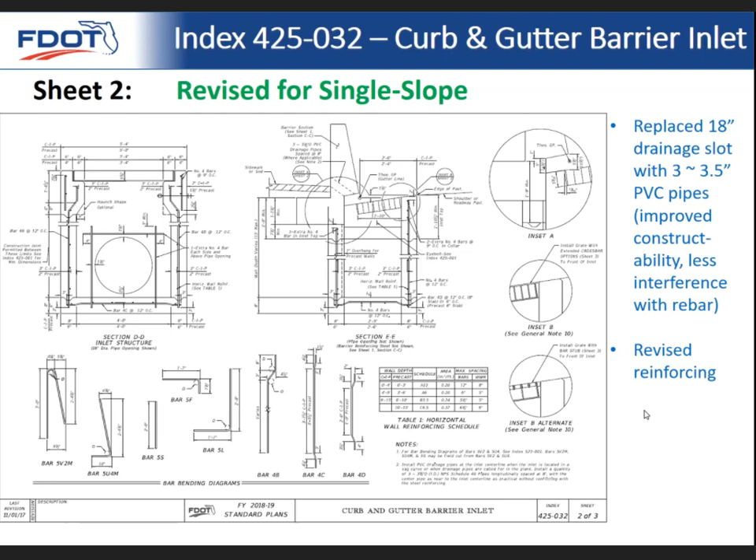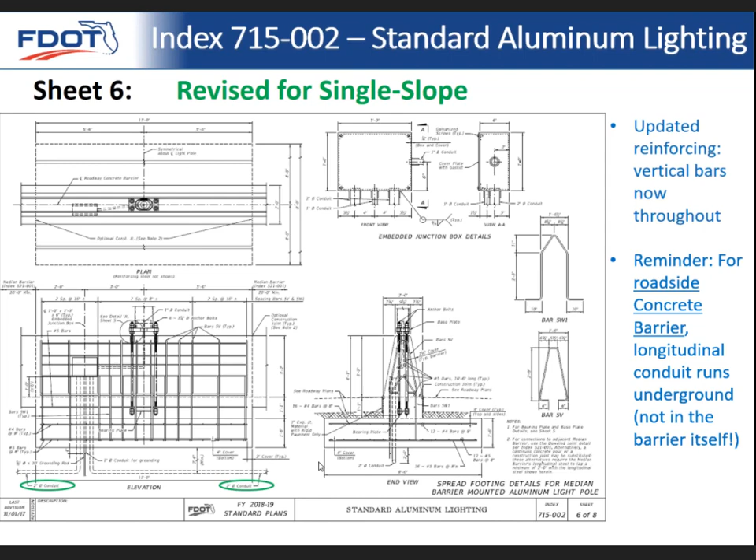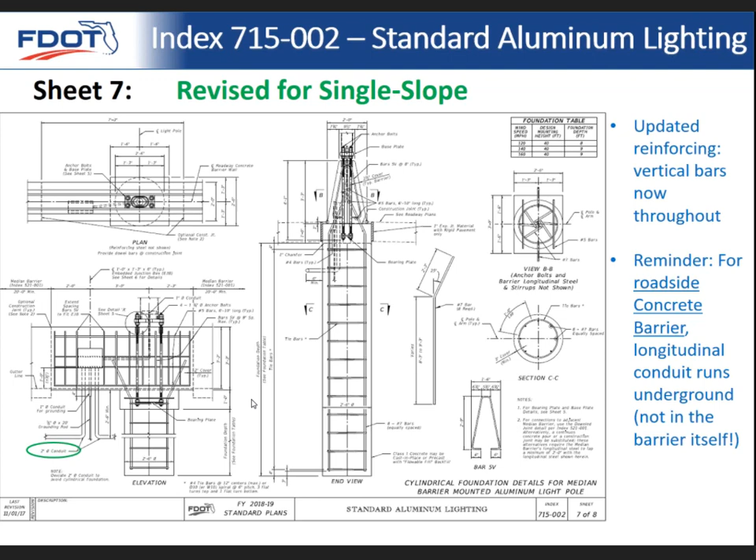Conduit goes underground - again, this is a different type of foundation, similar thing. Switch to single slope, spread the reinforcing out a little bit. Conduit is underground because it's a barrier on soil. Finally, this one is for traffic railing for mounting on a bridge deck, also switched to single slope. Just want to point out that this one has the conduit inside the traffic railing because it's on a bridge - there's no place else for it. It's sitting on a bridge deck.

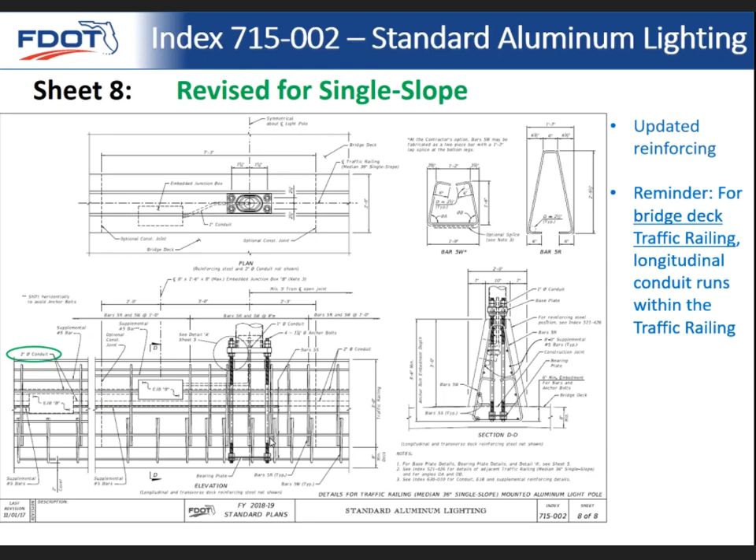With that, we've made it through all the indexes I wanted to explain today. You can go ahead and see if there are any questions - we might be able to push those to the end. It sounds like you've been addressing the questions, so with that, I'll pass this on to the next presenter.